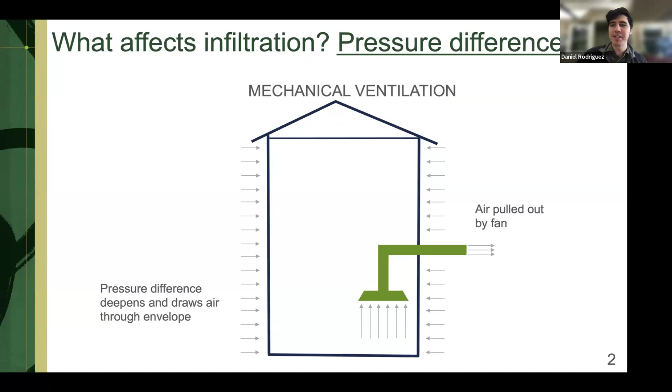The next mechanism is stack effect. Stack is driven by temperature - we have one temperature inside and a different temperature outside. In this case, we have warmer air inside than outside, and we'll have flow in at the bottom and out the top. The magnitude of that flow increases as you get closer to the roof line and as you get closer to the ground, because that's where the biggest pressure differences are going to be.

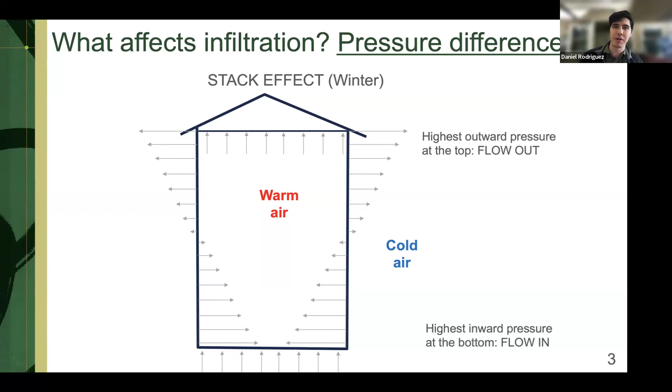The last one is wind. Wind hits one side of a house, and we have an increase in pressure on that side - you get infiltration there. Then you'll have negative pressure on the other side, and it will pull air out from that side. I see there's stuff in the chat - thank you, Paul. Tami made this one, so I can't take any credit for this.

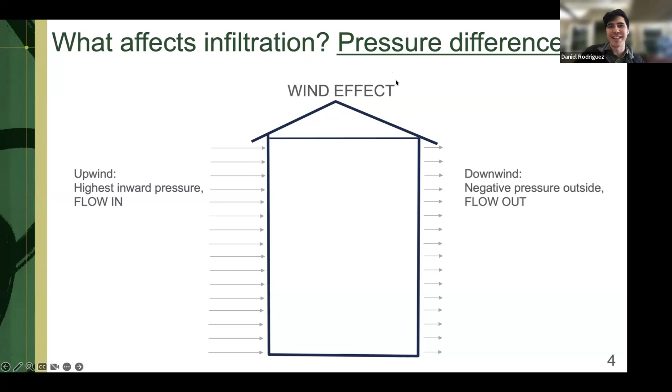Tami, you made it last summer in preparation for Healthy Buildings a long time ago. So this is another figure showing that visualization of wind affecting a house. This slightly blurry picture is from the MIT Learning Lab - we have positive pressure on one side, and what I like about this picture is it shows the swirling nature of the leeward side, on the opposite side of the wind.

You have negative suction there, the air being pulled out, but it's very turbulent, it's all over the place - it's not that smooth air coming in from the other side.

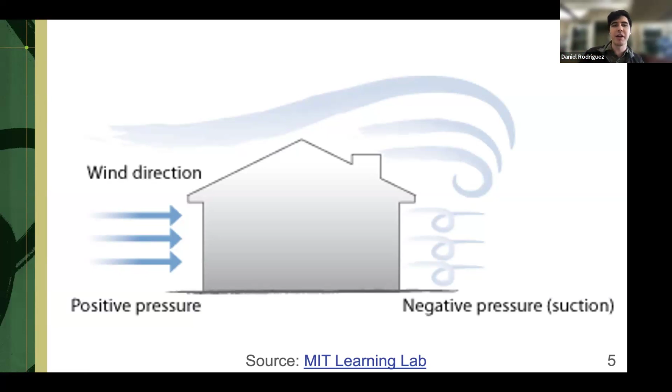So how we look at this and what we do for normal sites is we put 3 manometers, so 3 differential pressure sensors. 2 as close to the roof line as we can get on opposite sides of the home, and 1 as close to the floor as we can get on one side of the house, on the same side as those upper level measurements. What we hope to measure vertically is the pressure due to stack, and horizontally, the pressure due to wind. If we have wind coming in from one side, it'll show differential pressure from side to side. If we have pressure due to stack, you'll see a difference in pressure from top to bottom.

With 301, we did something a little different, and we doubled the number of manometers. So we have a high, a medium, and a low for both sides of the home. And so we can really look at that pressure gradient from top to bottom as well as from side to side. So a lot more instruments.

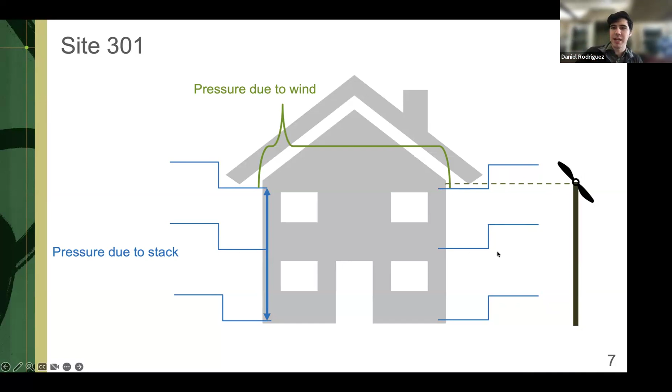And then you'll also notice everyone's little tiles are blocking this, but we have the weather station on one side, and that's going to give us all of our meteorology data outside. We want that to be as close to roof line as possible. We're not just putting it anywhere, we want to get it as high as we can.

But that gives us a challenge, right? So given our instrumentation, how do we attribute pressure differences to different mechanisms? We can start to look at some of these, looking from side to side, looking up and down. But what happens if you have multiple things happening at once? You start to get some influences from each in the other, and it starts to get complicated. It's not a very clear, straightforward process.

So when we take pressure measurements and we start to turn them into flow, we put them into these different equations that tell us how much air is moving based on these pressure differences. These are called infiltration models. This is kind of the nitty gritty of it, and we'll get even nittier and grittier in a few slides.

But kind of all equations have this format. We'll have the leakage area that tells us how big are the gaps and cracks, what is the area of those holes in the envelope of the building, in the walls and the windows. There's a geometric factor that tells us what is the spatial distribution of the leakage compared to the pressure, so where in the house are those leaks. And then the last term is those pressure measurements, the pressure difference between inside and outside.

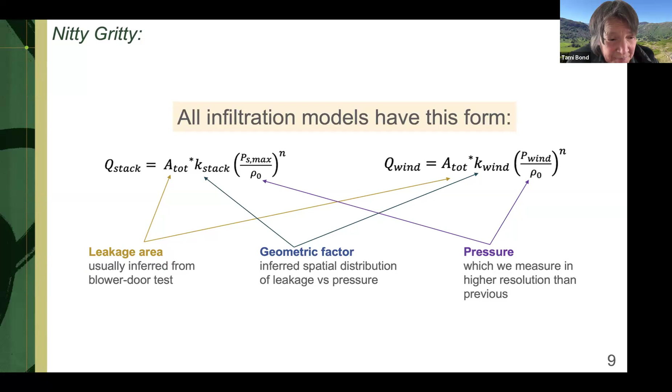Great, okay cool. So kind of what are these models doing? Like what is inside the model themselves? So if we look at this general form of the model, we can start to break it down.

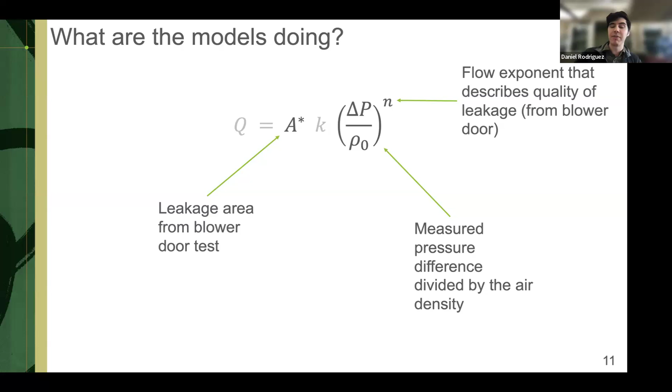So the A term, as I mentioned, that's our leakage area. We get that from doing a blower door, which tells us what is the total area of leakage in that home. We also have the measured pressure, so that's the differential pressure. And then we have this flow exponent, N, which tells us the quality of what those holes, gaps and cracks are like. Is it easy for air to pass through, or a little bit harder? That will also come from the blower door.

Or conversely, you might have an area right in the middle where there's no pressure difference, but maybe there's a big old hole there. So we won't have any flow through there because there's no pressure difference, right?

But determining that K factor, the geometric factor, is much harder for wind. So to try and get at that, we have to try and answer these 4 questions.

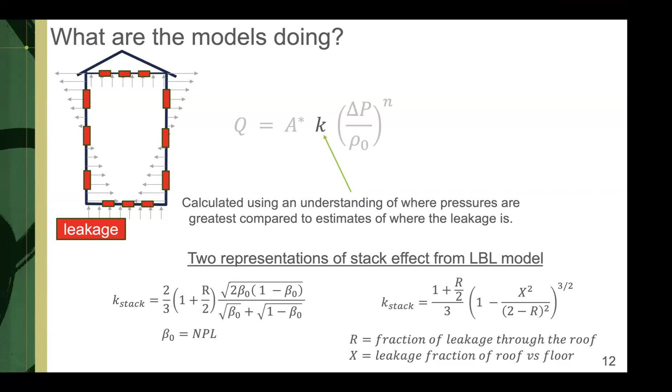I believe that R is the fraction through the walls, not the roof. Okay, yes, so the fraction of leakage to the walls compared to through the roof. No, as a fraction of the total leakage. Of the total, okay, got it. So if all of the leakage is 1, the assumption is that half of the leakage is in the walls and the other half is split evenly between the floor and the ceiling. So R would be 0.5 because half of the total is through the walls. Got it, okay, thank you for clarifying.

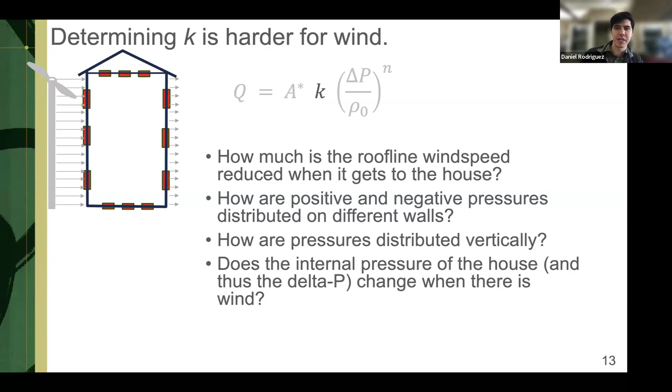When we look at determining this geometric factor for wind, it's harder because we need to know how much the roofline wind speed is reduced when it gets to the house. We need to know how the pressures are distributed on the different walls with positive and negative, as well as the vertical distribution of these pressures and the internal pressure of the house and how it changes with wind.

So how the infiltration models, specifically the LBL model, try to get at it is they make this mystical mix of old wind tunnel studies, averages across walls, a bunch of assumptions, as well as downscaling for local shielding. This makes a C prime term that then gets put into this equation. And I believe, Paul, correct me if I'm wrong, I think during Dom's thesis defense you mentioned that we know all of these C prime terms are extremely wrong, but no one's fixed them.

Yeah, that's correct. I mean,

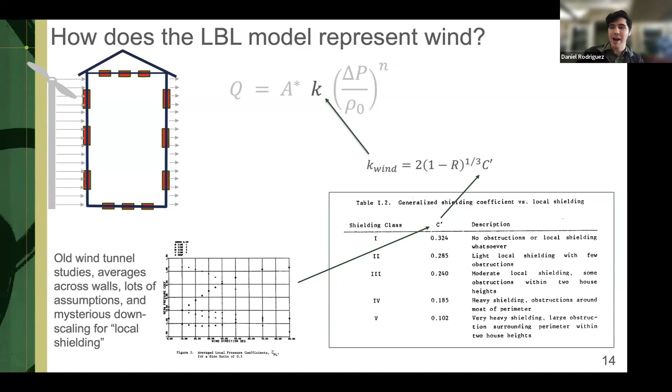There's an analysis done of a bunch of data on test houses on the Alberta prairie, and the values that would have lined up with the measured data would have put shielding class 5, which when you read that description, is very heavy shielding, large obstructions surrounding the perimeter within 2 house heights. That's not the Alberta prairie. So these C prime values are maybe not the most reliable, but it's what is currently used in the model.

So we have an opportunity to directly measure the pressures on the wall and to estimate flow from those direct measurements. We also can then compare those measurements to the flow estimates from the LBL model. And this feeds into additional challenges.

We know that pressures are also affected by stack effects. So how can we determine only the wind effect and how wind changes the flow? We also know that there's a lot of assumptions embedded into that K factor, the geometric factor, and some of those are invisible. So how do we test them to figure out what is reasonable and what is not?

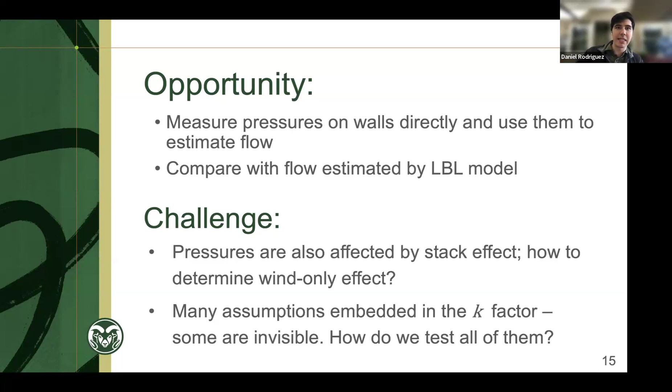With these direct pressure measurements, we can start to look at the total flow. And the total flow is great, but we want to know more. So our goal is to be able to take the total flow and divide out the portions of it, to understand what is from stack, what is from wind, to understand the influences from these different mechanisms on the home.

Feeding this back into sapphires, this might be something where we need to know—this would be useful to understand how big of a fan do we need, how big of pressure differences are we expecting inside and outside of the home, and how does the home behave in these different characteristics? If we have 90-degree days, or 90-mile-an-hour wind days, is it even worth it to try and build a fan to combat those differential pressures and that wind loading on the home?

So to try and achieve this goal of accurately attributing flow to specific mechanisms, we instrumented 301 with twice as many manometers, and we are trying to calculate the flow at each segment of the wall using the differential pressure measurement at that segment of the wall.

So this little visualization on the right with this radioactive green from the official CSU color palette - we have 2 manometers on each side of each segment, and we divide the home into 3 sections: the top, the middle, and the bottom.

Tami and I have developed this equation to calculate the total flow. So Q total is the flow total. Basically what it does is it takes the leakage of each segment of the wall, and divides it by the number of segments and the number of walls. It multiplies it by the differential pressure of that segment on that wall to the N, which is the leakage coefficient, so the quality of those holes. Then we sum it up to get the total for the entire house.

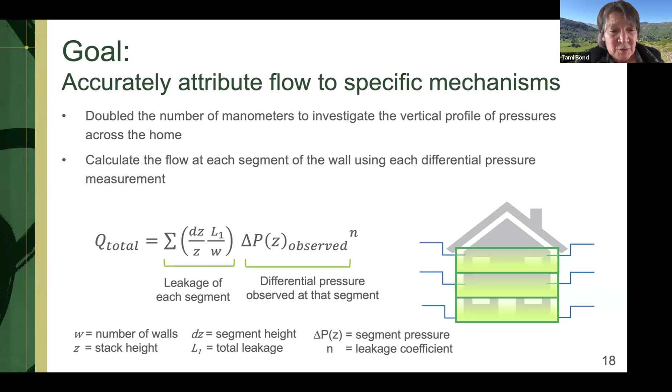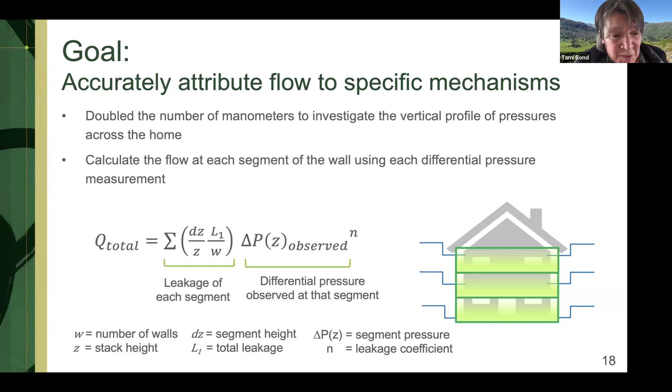Can I jump in here, just on that equation? Because I'm guessing Paul's probably noticed we have no idea what's going on with the roof. Right, so we do want to portion some of the leakage to the roof - that's where the R comes in. And it's not in these equations, but we also have no idea what the pressure is across the roof, so right now we're just looking at the walls. Yes, thank you Tami.

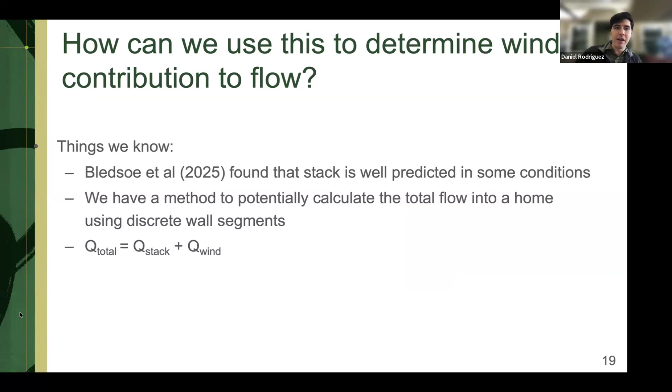So how can we use this to determine the wind contribution to flow? From Dom's paper and other work, we know that stack is well predicted. With this method, we could potentially calculate the total flow into the home using these wall segments. From that, we could back out 2 of these 3 terms - we could back out Q total, we could back out Q stack, the flow due to stack, and the total flow as well, which from that, we could hypothetically get the amount of flow due to wind.

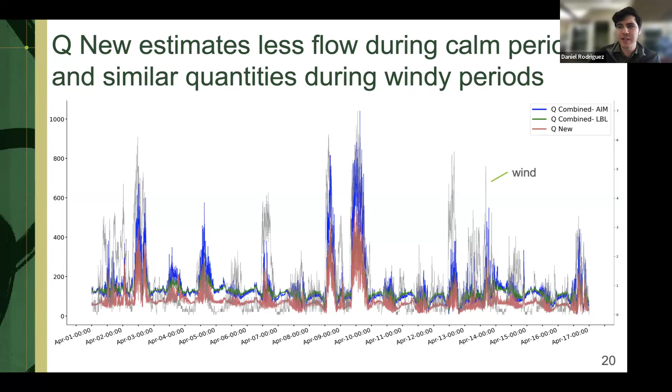So when we actually plug the numbers into this equation - I haven't backed this out by different terms, and this might be the first time Tammy's seeing this, so everybody bear with me. What we have here is gray is wind speed, blue is the total flow from the AIM model, green is from the LBL model, and red is from this new one - Q new. Very generally, you can see that red is going to be lower than blue and green, especially when it's calm. But when it gets windy, red increases - that Q new starts to approach the level of these other models.

So let's dig into this. I'm going to zoom into a couple different time periods. This first one is April 3rd through April 6th, and we can see what I just described. In these calm periods, like around here, after midnight on the 3rd, we see that Q new is pretty low compared to the AIM and the LBL which are higher. But when it gets windy, we see this red line, Q new, increases to a similar amplitude to the LBL and the AIM model as well.

There's even some interesting time periods - I think it's on my next slide - where Q new will be higher than the AIM and the LBL. So in this little period right here, and then in this period as well, maybe around 6 p.m. on April 3rd, 2025, we see that too. Looking at a second time period, from the 8th to the 11th, we can see that same pattern again. Tammy, I see a hand.

Sorry, can you go back to those? Yeah folks, this is the first time I'm seeing these data - it's not like we weren't working on it, we were, it's just coming together. So work in progress, but Danny, those look mechanical, right? Yeah, and so I think what's happening is we're seeing the delta P in the real data affected by the mechanical, and probably can't be attributed to wind.

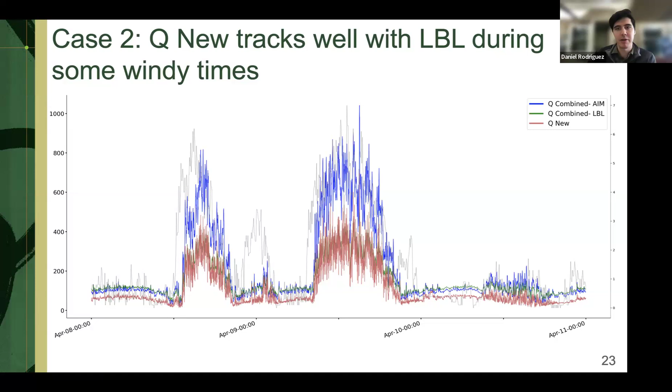So zooming in on this period around April 9th, this was something else interesting in the data—instead of LBL and AIM both being much higher than Q New like before, in this case Q New seems to track pretty well with the total flow from LBL during the windy period. So I thought this was interesting: the trend of Q New being different from LBL isn't always true, and sometimes we can see agreement between the models.

Well, that's just weird. I know. Because they've all got the same inputs, right? It's not like you changed the inputs. So curious. Yeah.

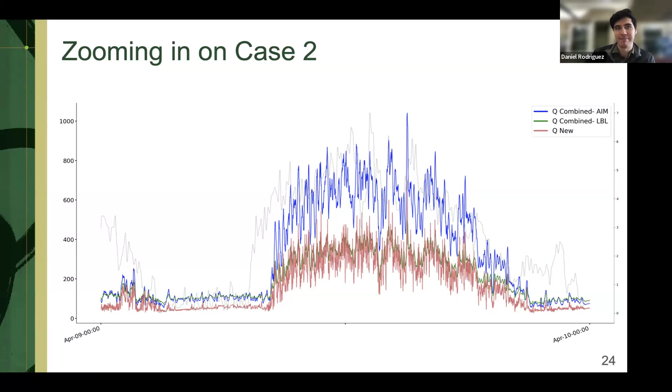Okay, cool. So kind of starting to wrap up and opening this up for discussion. Some questions we have are: is Q New a reasonable approach to mitigate the difficulties of using the K factor, that geometric factor? And one thing I'd like to know is why Q New is consistently lower than LBL and AIM during calm periods, when LBL and AIM are supposed to be well constrained during those times.

And I think, Tammy, what you said about the floor and the ceiling could be a reason why we're seeing these differences, as well as why Q New tracks so well with LBL during some windy periods. We haven't looked extensively at the data record, so I don't know how prevalent these cases are, but if it happens more than once, I think that's something interesting we could unpack a bit.

Our main takeaways from this are that attributing pressure differences and flow to different mechanisms is still very difficult, and using direct measurements of differential pressure presents an opportunity to calculate the flow for each wall segment. That's all I got.

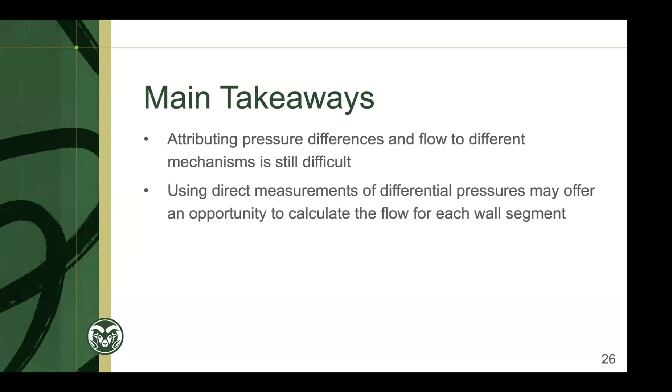Can I give maybe a perspective on this work? So the tech that Christian and Paul are working on, Christian's taking input from a delta pressure sensor. It's not necessarily using this information to decide how much flow to put in, which is good, because if they were waiting for us to figure out how buildings work, we would never install anything anywhere. But this is sort of the building science part of it, trying to build that up so it can be a complement to just the simple empirical measurement.

I have a question or discussion point. First, super interesting stuff. I think I have lots of questions that I need to digest on, and I need to get into those equations a bit. But if we take a step back, do you have a feel for how much these differences or discrepancies matter? What I mean by that is they're never going to exactly agree, they're never going to agree exactly with reality. We know that, we accept that - that's just the way numerical approaches work. But I don't have a good feel for the type of variation you were showing in terms of real world impacts, and how much it's going to matter, like from an air quality standpoint or thermal budget standpoint. Have you gotten to the stage of asking do we care that they don't agree at the quantities you're seeing?

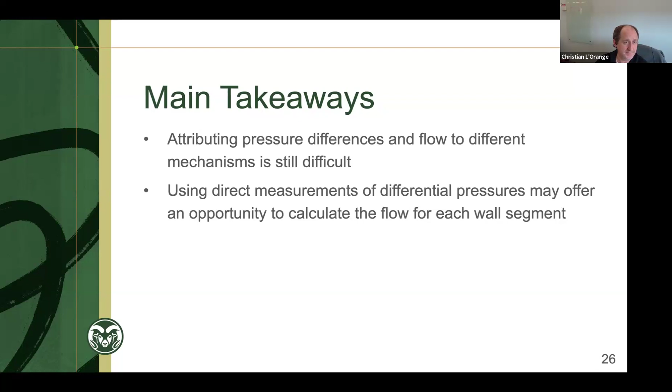I don't know, I think I might pass this one to Tammy. Tammy, if you have any thoughts on answering that question. Yeah, so I'm always happy to let you take it first, Danny, and then back you up.

But Christian, I think the overall principle here, which we haven't quantified yet, is that there's been a suspicion for a very long time that wind models overpredict, probably by a factor of two. And so that means that if people are planning for windy periods, they're likely to overestimate the amount of flow that occurs, and in your case, the amount of flow that would have to be counteracted. So let me just answer for the windy period - yes, it does matter, because during those periods alone, wind is dominating the flow and it's overestimated. And likely the reason it's overestimated is some of what Danny showed, that people just made up shielding values and they don't seem to have been really checked in terms of the average.

So you can attribute a large amount to wind that doesn't actually exist. In terms of energy budget, you'd have to figure out how much those contributed over the whole year, and that's something we're planning to do in Danny's paper. We have not measured the whole year except for this one case, but we can extend it, doing our best job, by using weather data. So first we look at the period that was measured and then we extrapolate to the whole year - that's an answer we're probably going to have.

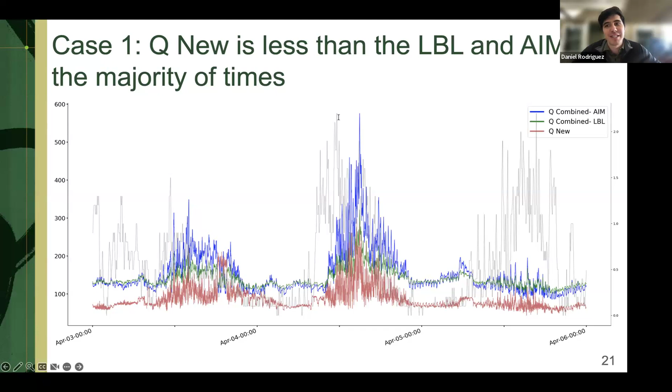You want to address that, Danny? I will let you address this one, Tammy. Okay, I'll be quick because we're over. And then Danny, you can say if you disagree.

So Paul, in general, for the assumptions we're making for floor and ceiling—not just this house, but all the ones we did during Epic—if it has a slab, we're assuming no leakage. Then we're assuming the rest of the LBNL model assumptions, like the same fraction in the ceiling, so we just adjust the X and R in that way. If that makes sense. Yeah, I agree with that completely.

And the nonlinearity, I think, is something Danny and I are looking at. The current thinking is we try to predict what the stack pressure would have been, since we're confident in it at that point, and then attribute the additional pressure due to wind. So we have a counterfactual of what the stack would have done, and now here's the total, and the attribution to wind is the difference.

Yeah, I agree with that, and I didn't mean to suggest that was something I'd disagree with—I think that's completely right. That is a contribution to infiltration from wind at that condition with that stack. But as this process goes forward, there may be some question of what that increase looks like for different wind pressures, and how that changes with different stack pressures, which could point toward an overall nonlinear model. But clearly, the difference between Q total and Q stack is the additional contribution from wind at that condition.